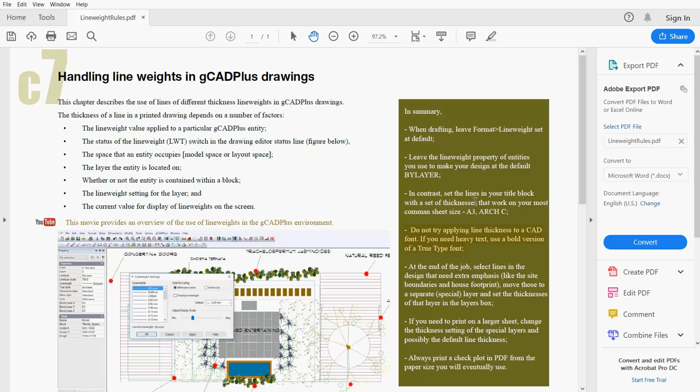So move those to a separate, rather special layer and set the thicknesses of that layer in the layers box. Then if you do need to print a larger sheet, all you need to do is change the thickness setting of the special layers that you've created, and possibly even the default line thickness, and finally print a check plot. So that's just reminding you of the rules. So let's look at a practical example.

In this particular design, the majority of elements here, we've just followed the rules. If I pick this line here, which is a polyline, notice its line weight is just set by default. The same applies here to some hatching. It's default. Virtually everything in this drawing is drawn by default, which is how gCADPlus works.

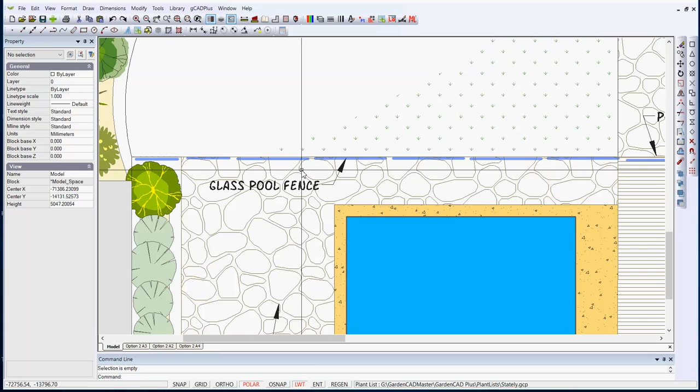There are some entities in the drawing which are showing thick. You may notice the glass pool fence. And if I select that line there, note that its line weight is now not by default, but it's being determined by layer. So if we go here to a layer called fence, its colour's been set to 161 and the thickness to 1 millimetre. Very thick, and I'm exaggerating things.

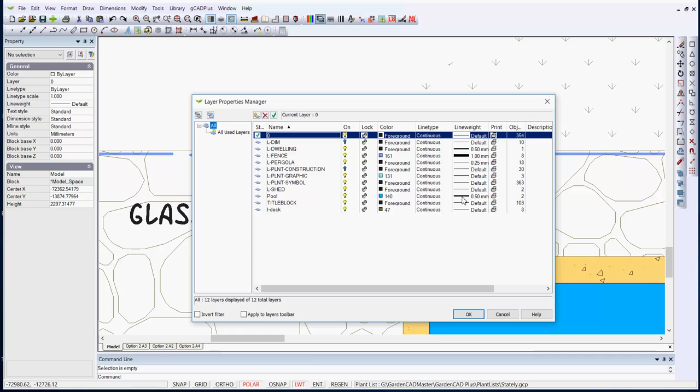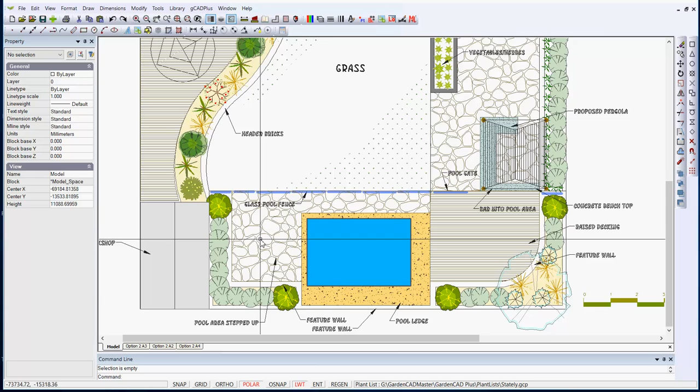Notice two other thick layers, one called pool and one called dwelling. So I'll cancel from there. The names don't mean much, but if we now look at the pool and select it, the same will apply there. It has line weight by layer, and I'll remind you, whereas everything else here is a polyline, it's just the default. And the same applies if we move up to the dwelling. Here's another polyline that's on a particular layer called dwelling, and its line weight is set by layer.

So in this drawing, three entities, the dwelling, the pool fence, and the pool, have all been put onto their own layer and a colour and line weight associated with that layer. And that will have an impact when we go to print. Everything other than those three items will be printed with whatever is the current line thickness. And if we go to format and line weights, the current line thickness is the default of 0.25 of a millimetre, or if we moved to the imperial system, 0.01 of an inch.

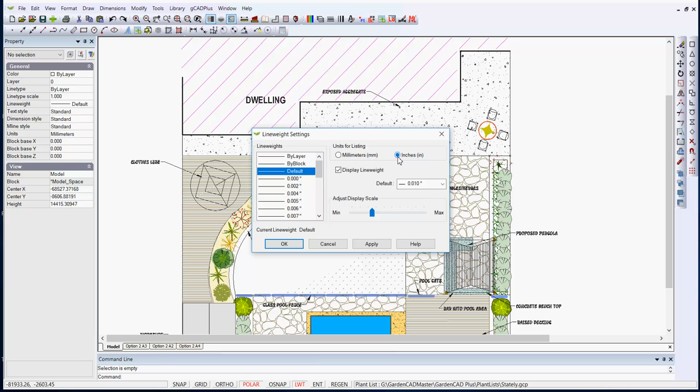Well, let's now print the design and hope that we get the line weight effect that we want. I'll move to an A3 size sheet. So here's our full design. I've got line weight switched on, and I'm going to print that to a PDF file. So file and print, and I'm using the Bullzip PDF printer, 600 dots per inch, and I'm fitting it to the paper. I do have a scale incorporated within it, so that should work well.

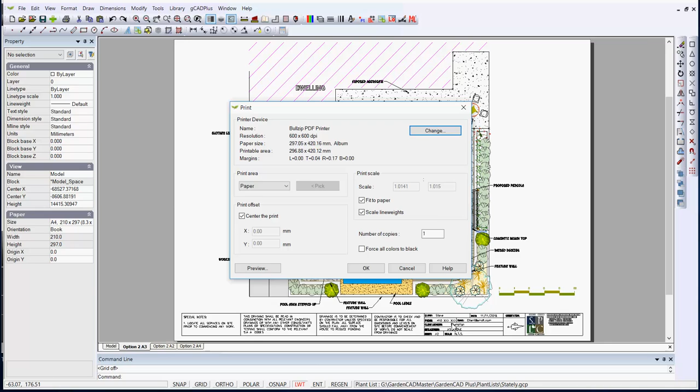So I'll simply say print, and what I hope to see are the line weights appearing and give us a nice print with a range of weights to give us increased definition. Here is the result. I'll go full screen and I'll zoom in a little, and then we can pan down. So I hope you can see already there's the thick line around the dwelling. As I pan up, we've got a thick line around the glass frame for the pool fence and a thicker line around the pool itself.

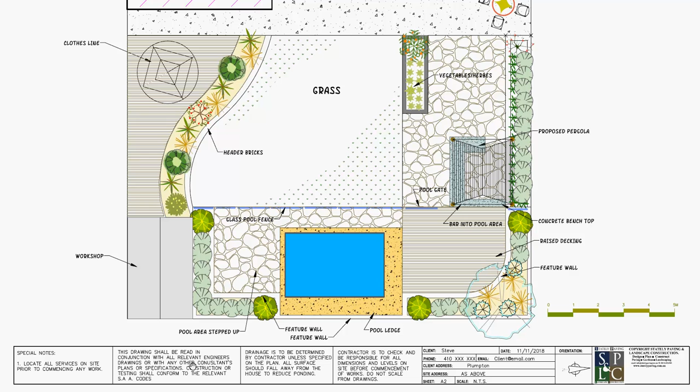The title block's also got a slightly thicker border around the outside. So we're printing a range of line weights within this particular drawing. Well, just to recap, we've set the line thickness of the dwelling at 0.5, the fence at 1, and the pool at 0.5. If we now cancel from there and go into an A2 size sheet, so we're pumping the sheet size up, what I'll now do is print PDF, and you'll find the lines are finer because you're going on to a much bigger sheet.

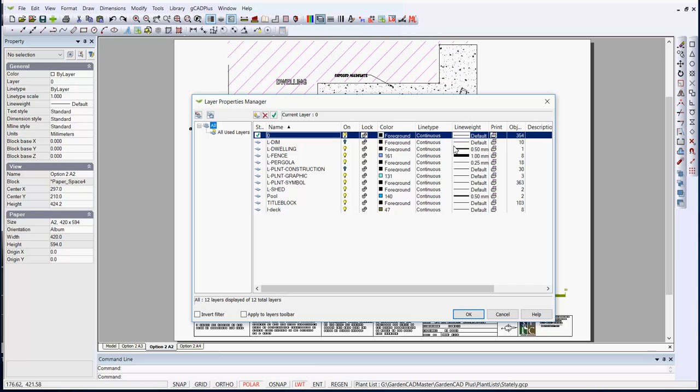The way to correct for that would be to simply go in here and just change that thickness. But I'll print this drawing onto the A2 sheet, leaving those current settings. So the take-home lesson, of course, is you develop most of your design work on a sheet that you're comfortable with, the sheet size that you would print and give to a particular client, and get the thicknesses of lines that you want to emphasize set appropriately.